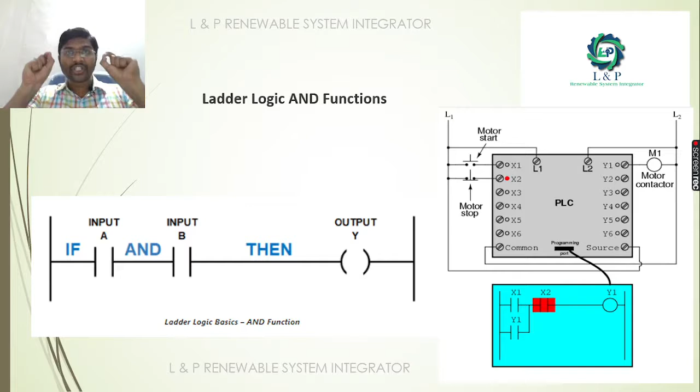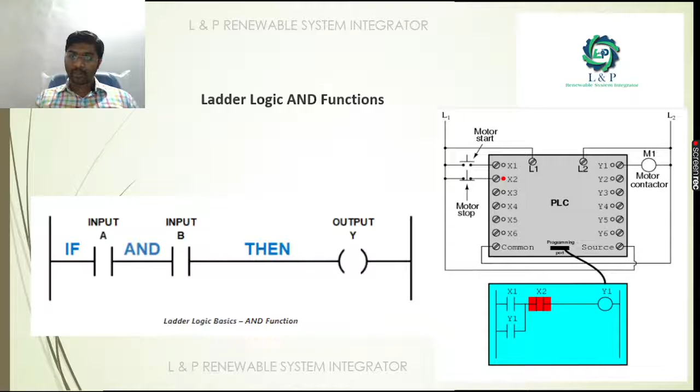ഇതിന് ട്രൂത്ത് ടേബിൾ നോക്കുമ്പോൾ, if both the inputs are false, the output is false. That is, if both are 0, the output will be 0. If one input is false and the second input is true, then the output is false. If both the inputs are true, then only the output is true.

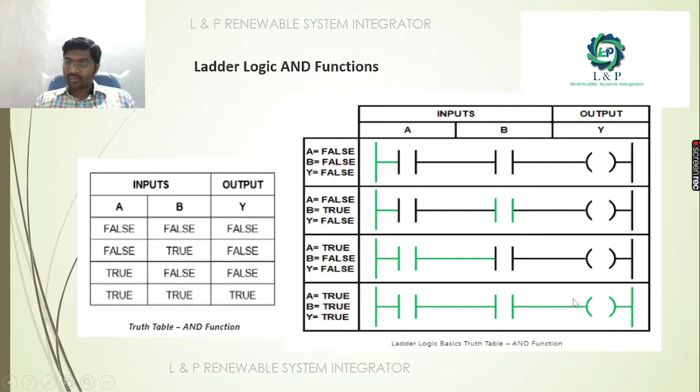So our ladder logic simple ആയിട്ട് ഇവിടെ കാണിച്ചിട്ടുണ്ട്. ഈ ഗ്രീൻ എന്ന് പറയുന്നത് whenever we are enabling or making it true, what will be the output? Okay, so output we are getting only when both the inputs are true.

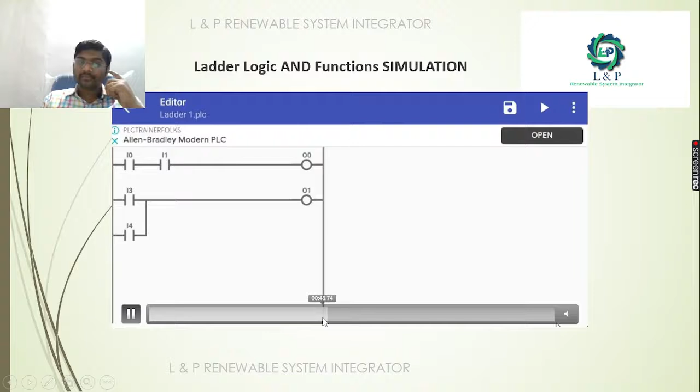ഇപ്പോൾ നമ്മൾ എന്ത് ചെയ്യുന്നത് പറഞ്ഞാൽ ഇമ്മീഡിയറ്റ്ലി സിമുലേഷൻ ഓൺ ചെയ്യുന്നുണ്ട്. So we are enabling I0, still there is no output. Now when we enable I1, immediately we will get an output. See here we are getting the output. Okay, now when you switch off any one of these switches, the output will be off. This is the condition of the

AND gate. Okay, so same method, if you go for an OR gate, if any one of these inputs is on, the output will be on. So I3 is on, the output is on. Okay, when I4 is also on, the output will be on. If you switch off I3 also, because of this I4 input, the output will be on. So this is how AND function and OR function is implemented in the simulation.

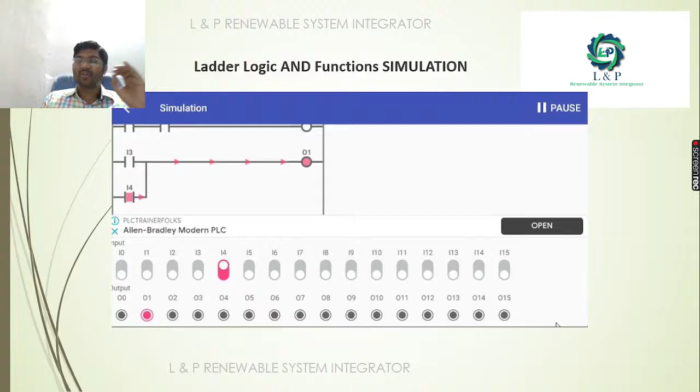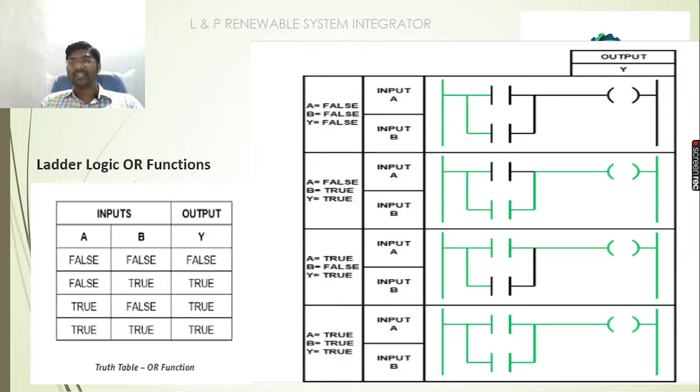This is the ladder logic of this OR function. Basically, if any one of these inputs is available, the output can be on. So this is the truth table of the OR function. If both are false, the output will be false. If any one of the input is true, the output is true. If both the inputs are true, the output will be true.

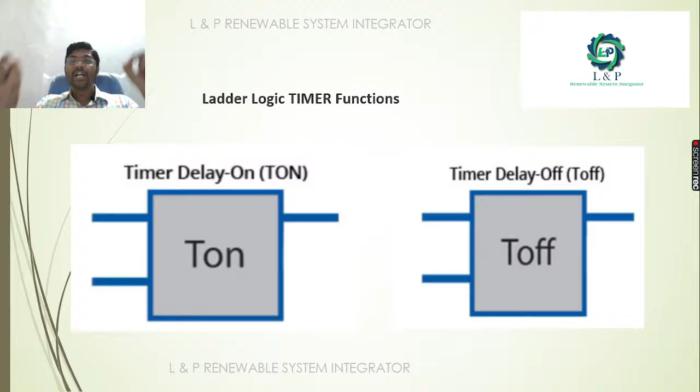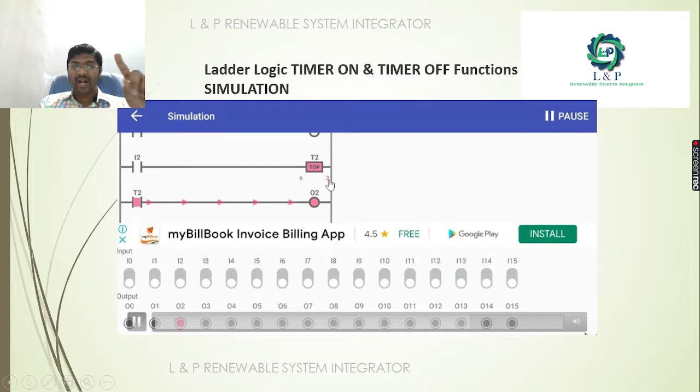Now when we switch off I2, what is happening? Immediately the timer will start. See here, if we trigger the off function. See, now I am making the input off. The timer is starting: 6, 5, 4, 3, 2, 1, 0. The output will be off. So this is how you can use the T on timers and T off timers for your functional applications.

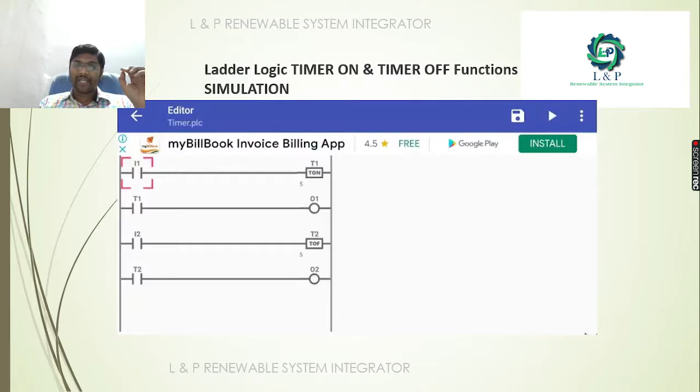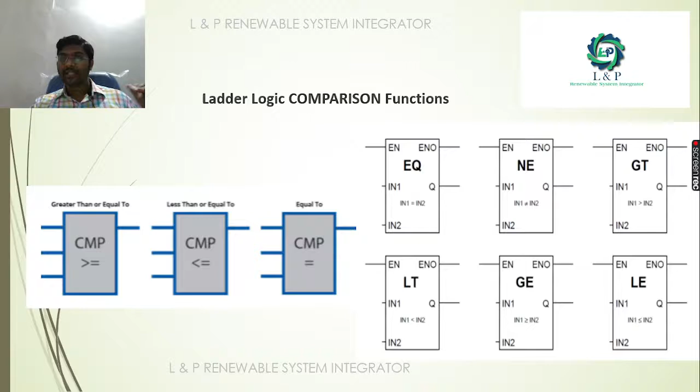Maybe we will get an electrical output, that is 4 to 20 milliamps. We will convert that into binary. So we are making an analysis. If input 1 is less than input 2, immediately the output should be on. Like this, based on our application, we can define whatever we want inside this PLC ladder logic.

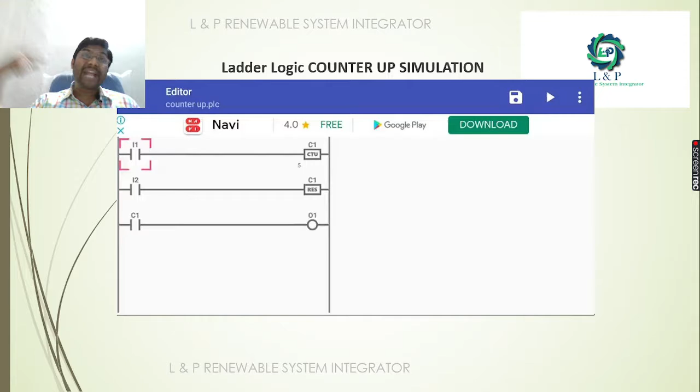See now, normally based on the input it will come and go. Like this we switch on, off, on, off. Whenever it crosses through that particular sensor, that particular device, we can take that count. Using that count we can enable a particular output. See now how it is working.

It is an up counter simulation. Counters come in three varieties: up counter, down counter, up-down counter. Today we are going to discuss the up counter simulation. We can...

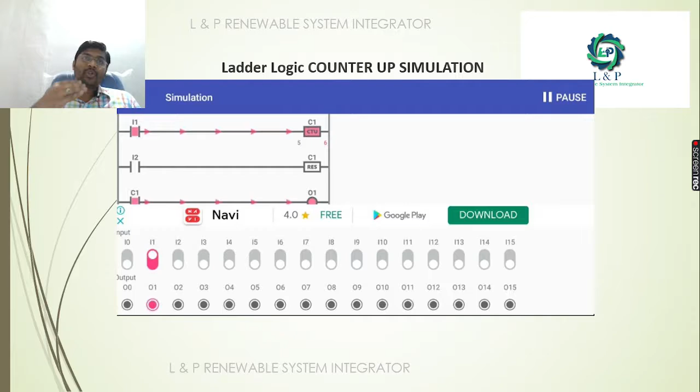Even in the precision industry, if you're doing any sort of application using servo motors, with the help of this counter application you can make them stop at a particular point. For example, in the cutting industry, a big steel sheet is moving and you want to cut it exactly at 10 meters distance. In such places you can go for these counters.

There you can go for encoders by calculating the circumference. By implementing that inside and getting the feedback from the encoders at a particular circumference, we can stop the plant and cut. So like this, many applications can be done with the help of these counters.

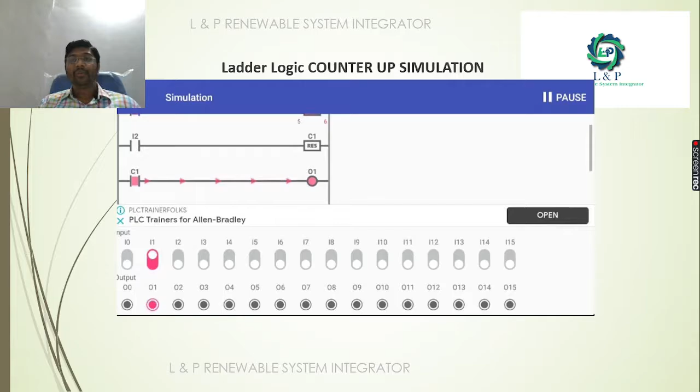Next, the count down application. How it works: if there is a preset value 6, then 5, 4, 3, 2, 1, 0. When it reaches 0, immediately we can enable the output. This is how a down counter works. Let's simulate how a countdown counter works. See, here we have provided a counter.